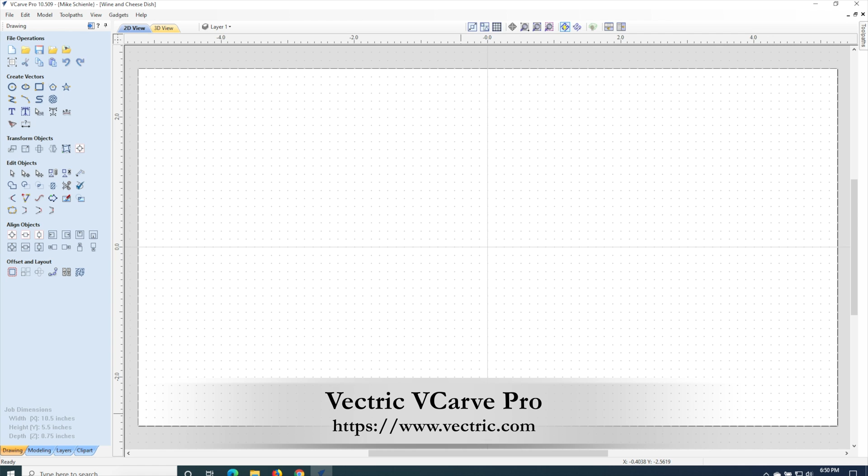Okay, so the first thing we do, using Vectric VCarve Pro, is go ahead and create a square. The size of this is 10.5 inches by 5.5 inches and 3/4 of an inch thick. We're measuring from the machine bed, from the center, and that's pretty much all we need there. It's single-sided. So the first thing we're going to do is create a 10 inch by 5 inch square, and we'll start that.

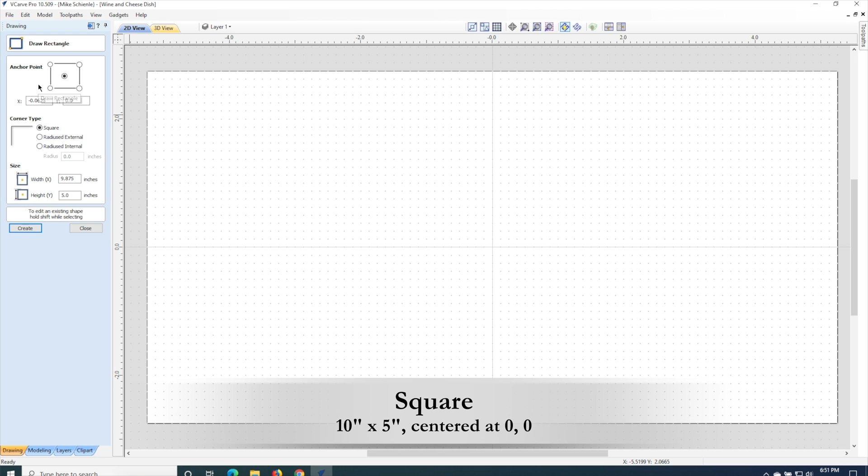Zeroing on the center of this, and then we'll put in the dimensions, 10 and 5. The next thing we'll do is put in a circle, at -3.5 in X and 0 in Y, with a diameter of 1.5 inches.

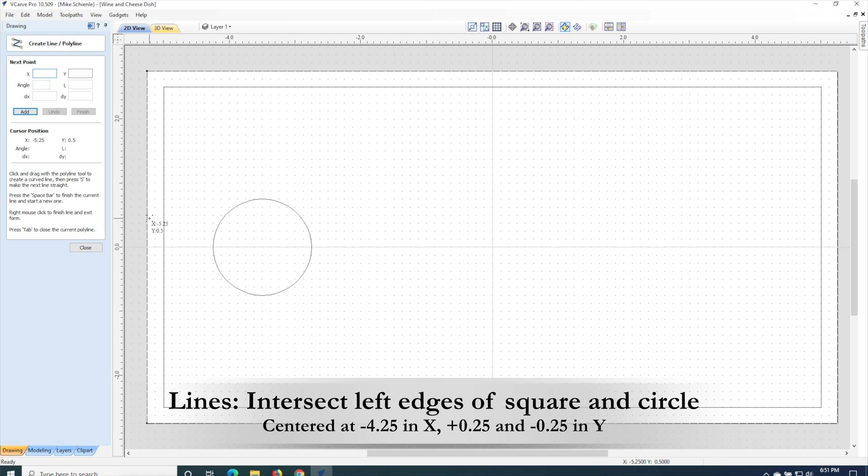And the next thing we're going to do is put in some lines here. We're going to make that slot for the stems to fit in. This needs to be at 0.25, and it just needs to intersect straight across into the circle. It doesn't have to be a particular length. Once we've done that, we're just going to flip it around the center, flip it vertical, and close that.

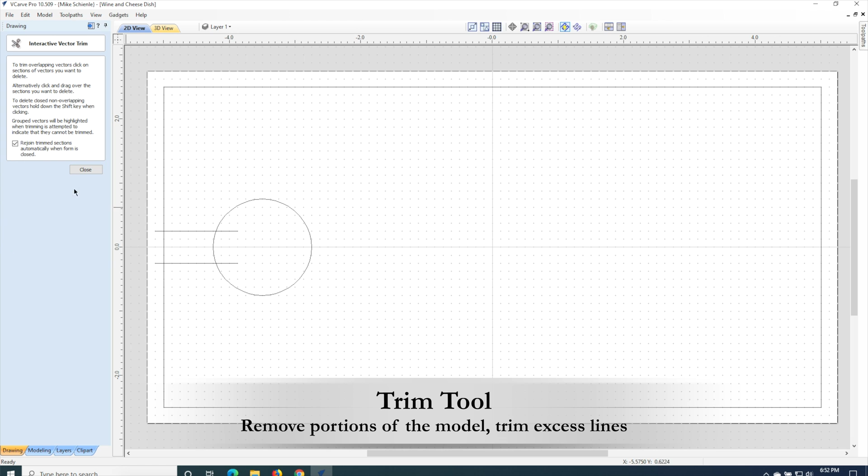Okay, now what we want to do is trim all the parts that we don't want on this. So we'll use our little clippers here, and I'm going to get rid of that center and that center. Then we'll go ahead and get rid of the extra edges here.

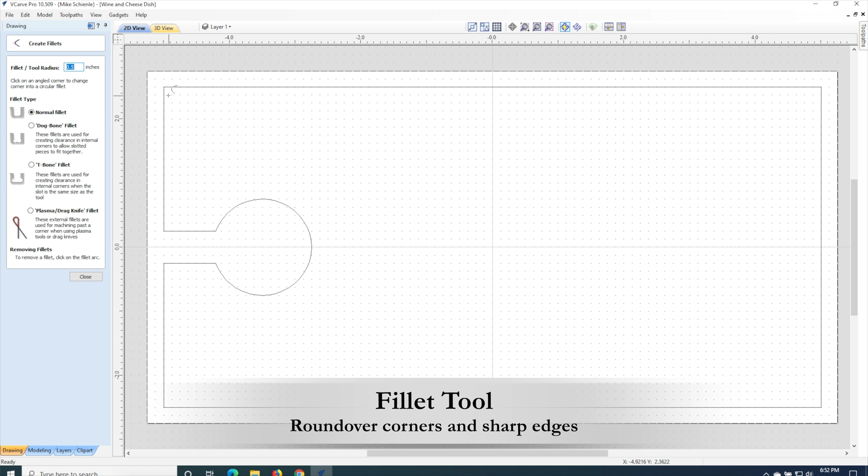Okay, that's the basic shape we got, and now we have to fillet these corners here so they all round nicely, using our fillet tool. We'll start off at 0.5 inches for the outside corners - that one over here on the right, down at the bottom right, and then off to the bottom left. And then we want to set these corners at 1/4 inch. So we'll do that, cut each one of these, and that's it.

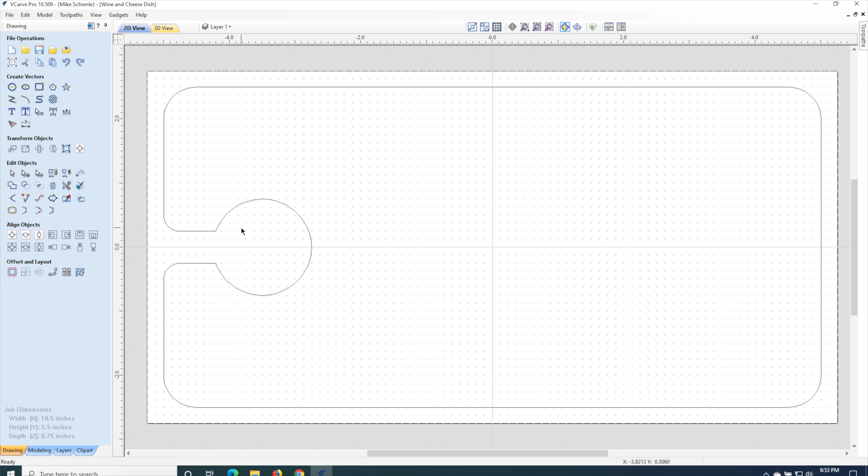That's our entire shape. We're going to go ahead and create our toolpaths for it. Okay, so let's talk about the toolpaths.

You see we have 7 toolpaths lined up here. 3 of them are responsible for the interior of this whole thing - 2 that do a roughing pass and 1 that does a finishing pass on the inside. Then we have 2 that do the outside: 1 roughing pass and 1 finishing pass. And then we have 2 that do a chamfer - 1 does the outside around the outer edge, and another does one along the inner edge. Okay, so let's get into these real quick.

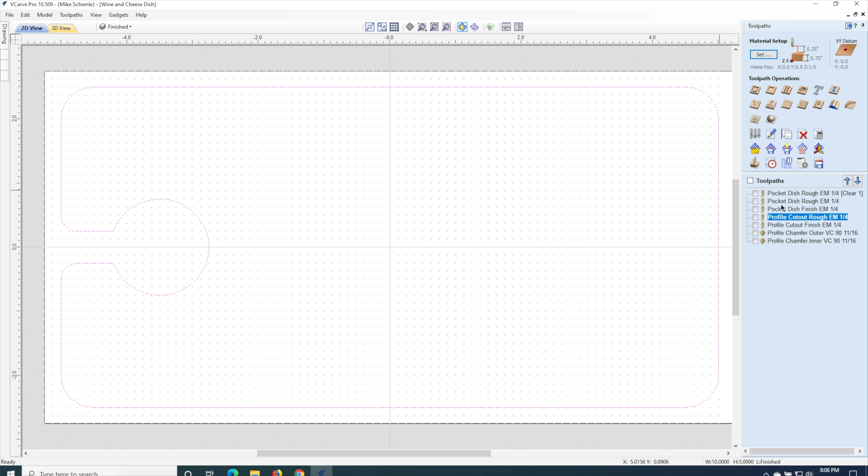Here's the roughing pass for the interior - this is the pocket of this. What we have is 2 bits, a 1.5 inch, which does a big clearing pass. It's going to take care of the majority of this internal area here. We start at 0, we go down to Z -3/8. Now Z is 3/4, -3/8, so that's half of it, minus 0.02 inches. Again, this is a roughing pass - we're going to take care of that 0.02 inches in the finishing pass.

Okay, so we have the parameters here for the 1.5 inch. It's raster, conventional, and does a clearance on the last pass. We have a 2-inch ramp on it, which means it's going to go across 2 inches while it ramps down 0.05 of an inch. Let me show that real quick - the maximum depth that this particular bit will go is 0.05 inches.

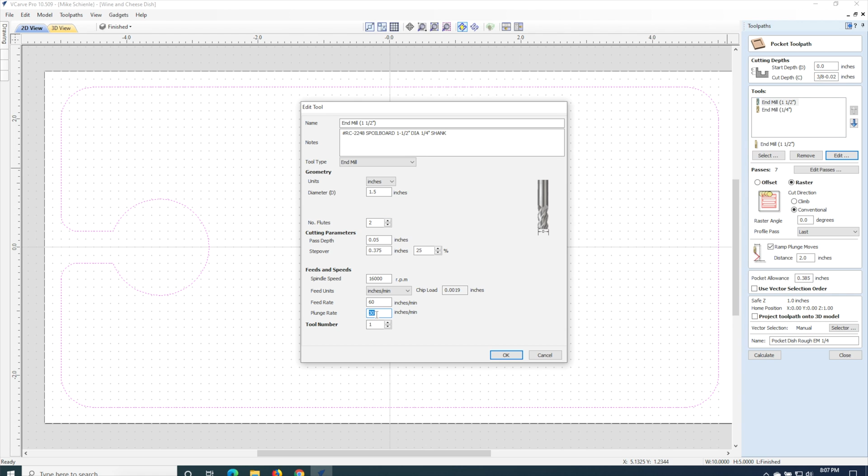Okay, and here's the speeds for it, 60 and 30. And again, that 30 sounds very high for 1.5 inches, but we're using that ramp, so it really isn't a problem. Okay, and then we have a pocket allowance of 0.385 inches. You'll see in the finishing pass that we have a pocket allowance of 0.375 inches, so we're going to pick up that extra 1/100 of an inch around the edges here.

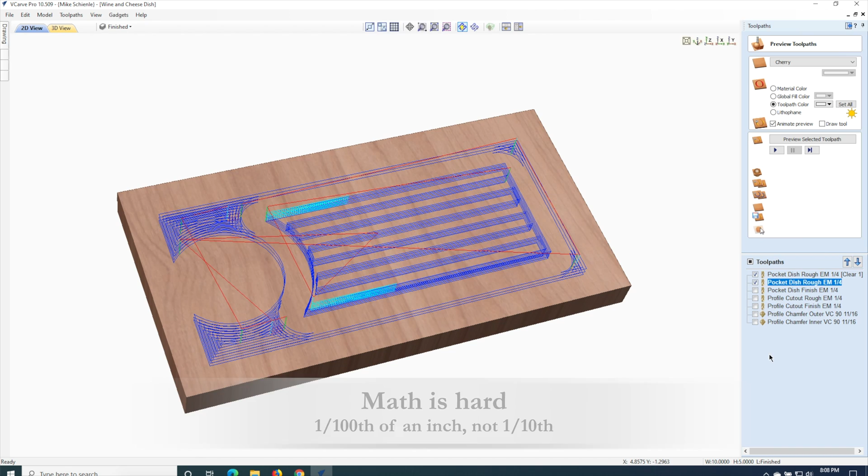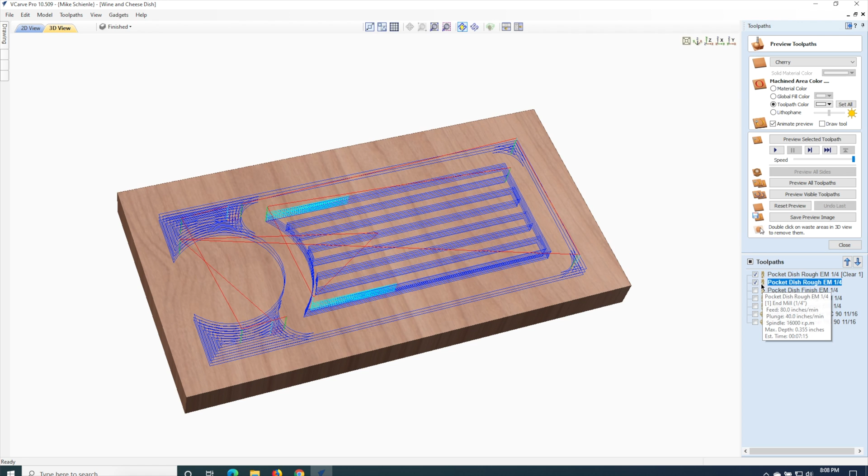All right, so let's go ahead and calculate that, and you'll see that it creates the 2 items here. I'm going to turn one of them off. Here's our 1.5 inch end mill that takes care of the majority of the insides of this dish. And you have the 1/4 inch, which is going to take care of the areas where the 1.5 inch bit can't get into the corners, as well as where it can't get past the edges here. So that's what all the 1/4 inch will take care of. Okay, so that's the roughing pass, and now let's get to the finishing pass.

The finishing pass again starts off at that Z minus 3/8 minus 0.02 inches, and I only go 0.02 inches down. Here's that pocket allowance where you pick up that extra 1/100th of an inch around the outer edge. We're also running this a lot faster. On the other one, the feed rate was 80 inches, now we're doing 120, and the plunge rate was 40, now we're doing 60. That's because we're taking off so little material that we can move much faster.

Let's go ahead and show that - this is our pocket dish finish end mill 1/4. Okay, we'll calculate that. You see these are much closer together.

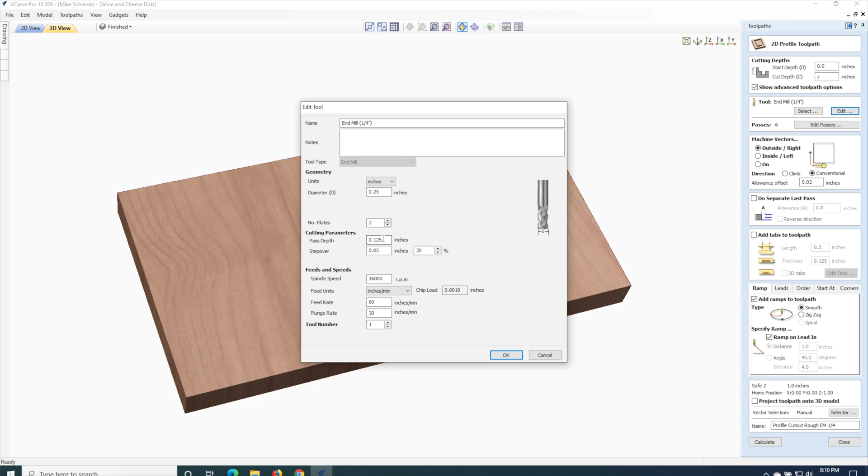So the next thing we do is an outside cutout, going around the outside of this. Again we're using this 1/4 inch end mill. It's going to drop through 3/4 of an inch in 6 passes, which means each pass depth is 1/8 of an inch, a feed rate of 60, and a plunge rate of 30. Since this is a roughing pass, we have an allowance offset of 0.02 inches.

Then we use ramps and leads to basically take care of getting into the edge here so we don't leave burn marks when the bit goes up and down. Again, profile cutout, roughing, end mill, 1/4 inch. Let's go ahead and calculate that - you see it's going along the outer edge of this.

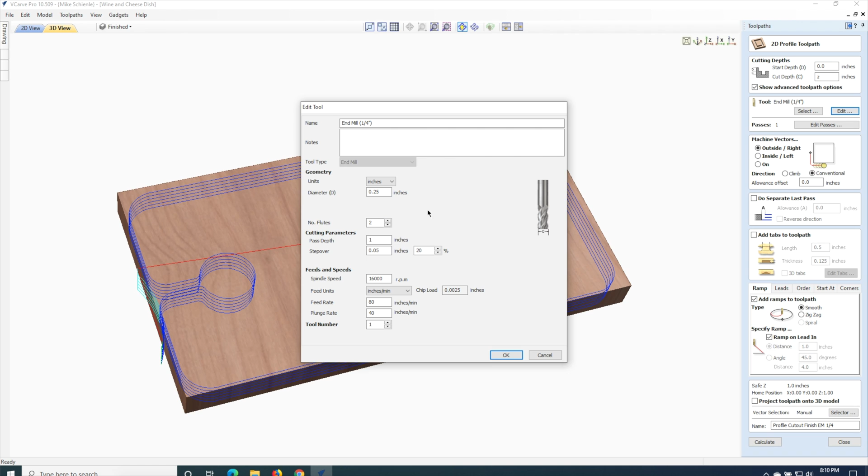Now we're going to have the finishing pass version of this. One big difference is we do full pass in one step here - everything is done in a single pass. The reason we can do that is our allowance offset was 0.02 inches, so we're only taking off a tiny amount from this. Basically that's to give it a smoother edge.

When we do this in steps, you can actually see little tiny marks from the end mill at each of the steps it goes down, so this will remove those. We have that same ramps as before, and this is our profile cutout finish, end mill with a 1/4 inch.

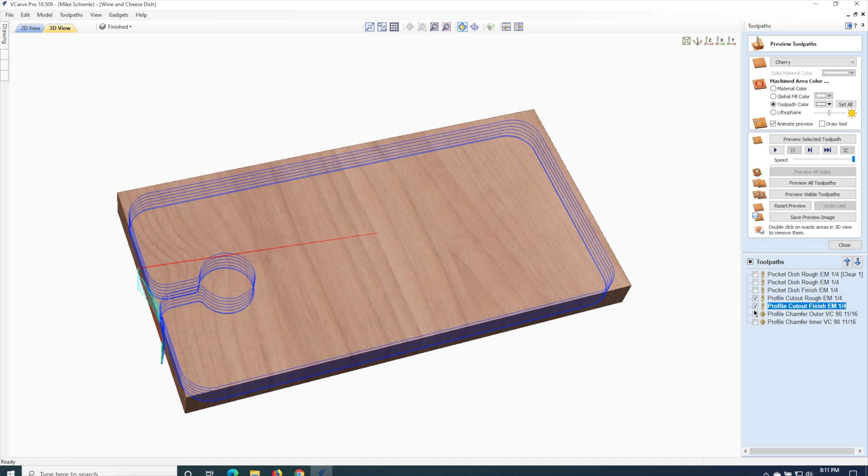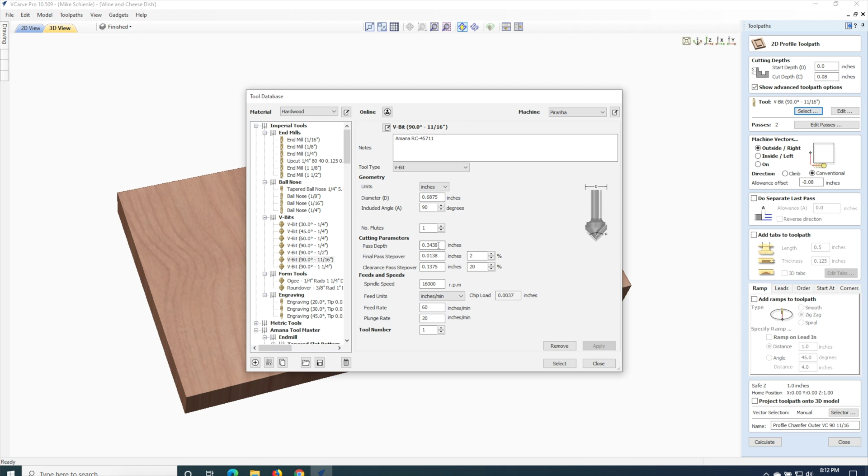Let's get rid of those two - the next two are chamfering the outer and the inner. We changed our depth to 0.08 inches, and we have a different bit here. We have a V bit, 90 degrees with a carbide insert, and it's 11/16 of an inch is the outer edge. It can actually plunge to 11/32 of an inch. Feed rate and plunge rate are 60 and 20. Let's go ahead and apply that.

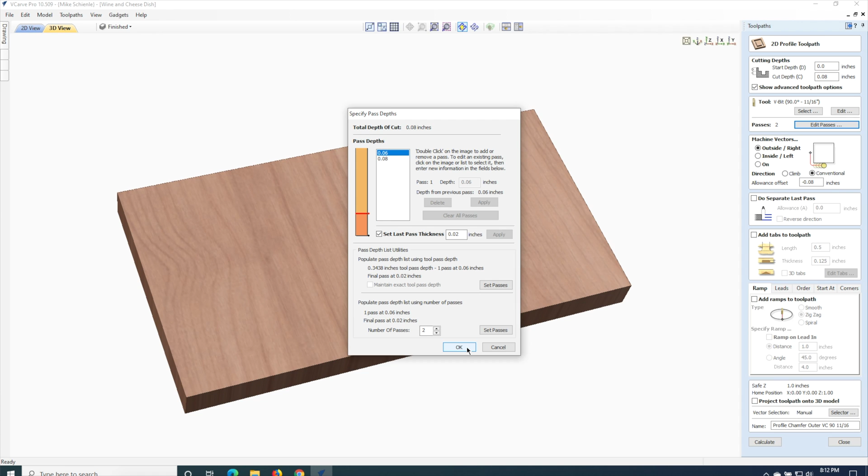Notice our allowance offset is -0.08 inches - that means we're going to cut to the outside of this using this larger bit. On the edit on the passes, the first pass we do 0.06 inches deep, and the second pass 0.08 inches deep - we basically want a smoother second pass. This is kind of doing our roughing and finish pass at the same time. Profile chamfer outer, VC - V-carve or V-bit, 90 degree, 11/16.

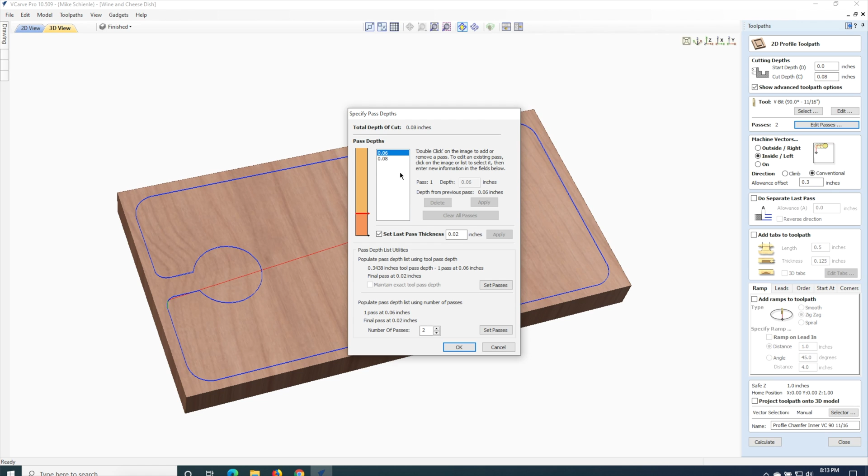Let's calculate that, and you see it's basically doing this chamfering along the edges here. We're doing the same thing with the inner - we just have a different allowance offset of 0.3 inches, which brings us to the inside of this. Notice we're doing inside left instead of outside right as the previous one was, using that same 0.06 and 0.08 depth. The rest is pretty much the same.

Profile chamfer inner, VC 90 11/16. Calculate that, and you see that it's on the inside of this.

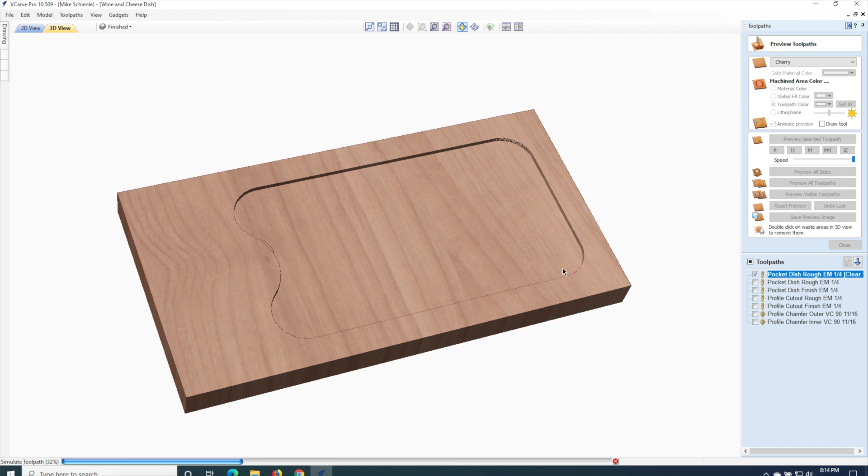So let's go ahead - okay, I've reset this. We're going to use this large bit and show it at full speed. You can see where it's using this ramp down for this portion, and it comes back and takes off. It's going to do several of these because it's only 0.05 inches, and it needs to go down nearly 3/8 of an inch.

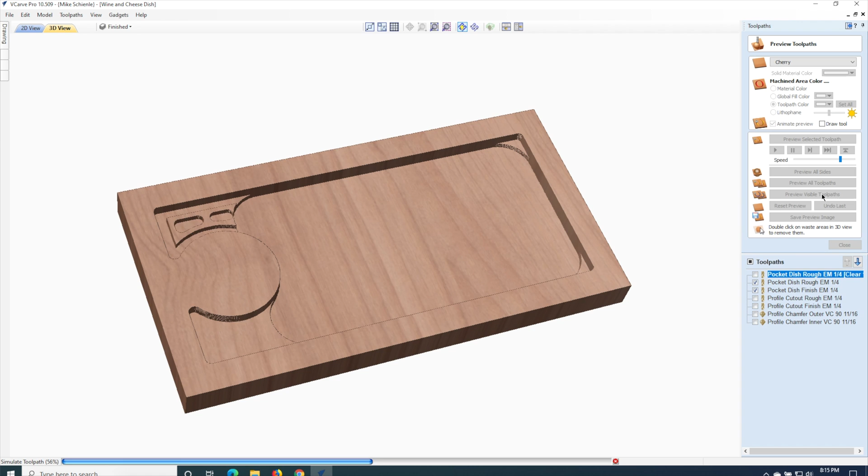These next ones I'm going to slow down a little bit - these are all the 1/4 inch passes, those two. You can see it knocking down the edges. Then you can see the finishing pass - you see how that's taking a much shallower cut.

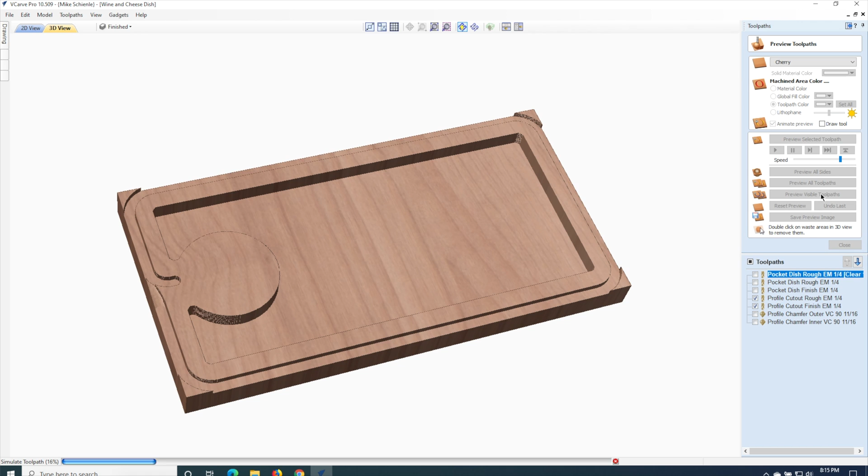Now we're going to do the profile cuts, which basically cuts the outer wood - the invisible toolpaths we have here are the chamfer passes. I'll slow that down even more. Here's the outer one, and it does it in 2 passes. Here's the inner one, again in 2 passes.

Right, and there's our project. So we'll go ahead and take it out to the CNC and watch it do its thing. Thanks for listening.